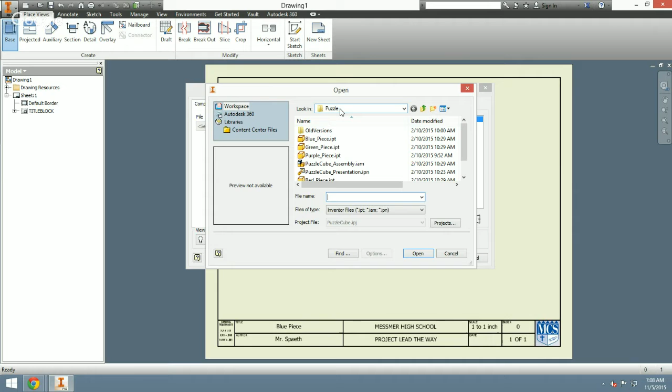So we're going to click this base button, and then we are going to hit this 'open an existing file,' and it should take you right to your Puzzle Cube folder because you set your project path. So we are going to grab our blue piece—I just double click it, and now I don't want to click anything else yet.

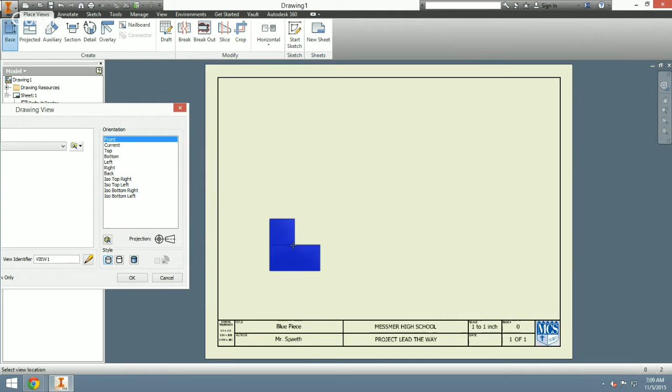What I actually want to do is drag this box out of the way because look what my mouse is doing. Okay, so it has my puzzle piece on there, a 2D version of it. The first view that I'm going to place is my front view, so I'm going to put it on the bottom left-hand corner of my page, leaving some room for dimensions—so right about here, right above where it says blue piece and Mr. Spaeth, maybe a third of the way up your page.

We can always move these around later, but we want to drop 4 views. Notice I can drop my right side view by clicking over here. I can drop my top view by clicking above my front side view, and I can drop an isometric view just by clicking at an angle away from my front view. Once we've dropped those, all I'm doing is just left clicking. I'm going to right click now and go Create, and there we have it.

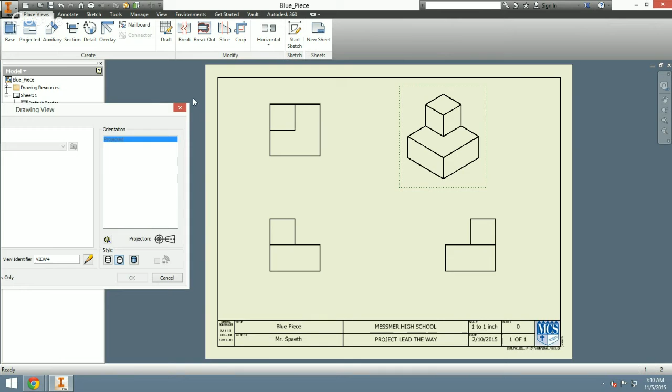Now I can add some color here, and it's very, very simple. Notice when I hover over a view, little red lines show up around them. I'm going to hover over my isometric view—again it brings up this box—and I'll drag it over to myself. I'm just going to put Shaded on, and look, it actually colors it for us, which is really nice. You can move these around as you see fit.

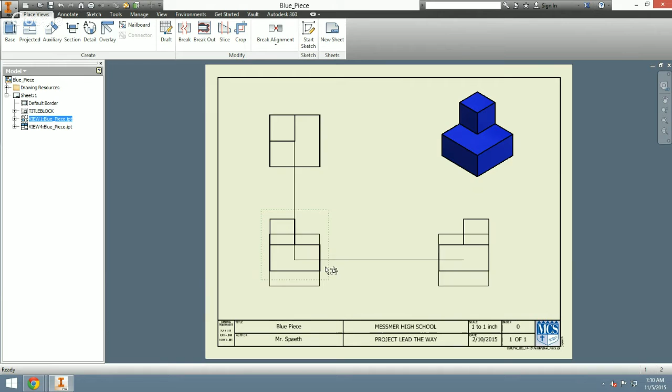Just make sure you don't click on one of these lines and move it, because that does some weird stuff. So whenever you see those little red lines and the little move symbol by your mouse, then you can feel free to move it wherever you want. So we have our front view, our top view, and our right side view. Again, you can move those however you want, but notice that by moving your front view, you move the rest of the views too.

Let's go ahead and put some dimensions on these. When putting dimensions on, I rarely use above my top side view or to the left side of my top side view. And I rarely use the bottom of my piece and the right side of my right side view. I like to keep all my dimensions within this little square, just to make sure everything looks really nice. Sometimes I can't do that, and there are dimensions I need to put out on the outsides, but for right now we should be able to do everything within that little box.

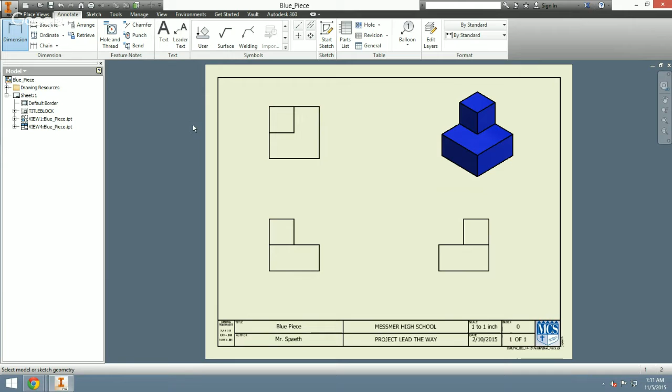So we're going to go to the Annotate tab, and we're going to use the Dimension command. There's a bunch of other commands over there that we'll learn later, but our Dimension command is really nice. Okay, so we want to dimension our features.

Notice with this little part sticking up right here, this is a great feature to dimension. All I do is click - let me grab dimension again. Notice you can click this green portion, meaning the middle of the part, and you can click the corners. There's a couple ways to dimension: you can click corners and then drag up, or you can not click a corner at all. Notice there's no green highlighted, and it just picks the corners right there for me.

Be careful, because sometimes what you really want to do is click none of those green dots, but what you end up doing is clicking a green dot and going up here, and I get a lot of questions like, Mr. Spaeth, this isn't working. So be careful with what you're clicking here. If ever you want to get out of dimension, I just push escape. Notice I'm in it right now, it's highlighted, I push escape, and I'm out of it.

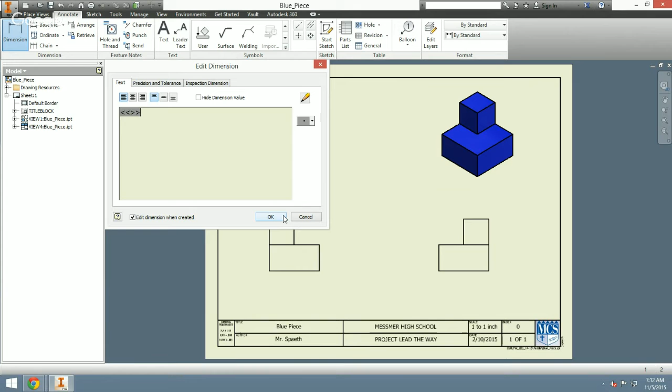So let's go ahead and dimension just the top of our top side view. Now, every time you make a dimension, this window pops up. I find it extremely annoying, so I unclick this button, Edit Dimension When Created, and click OK. That way, the next time I make a dimension - this time I'm going to do from right here to right there - it doesn't do it. I find that really nice. Again, I find it annoying that it pops up, so feel free to turn it off if you want to.

You'll notice that when I placed a dimension, and let me place another one here, I placed it on the marks where I had - notice all the lines are solid right here, and then there's certain places it snaps to that makes it a dotted line. This just kind of helps you space out your dimensions, and I want you to be able to utilize that.

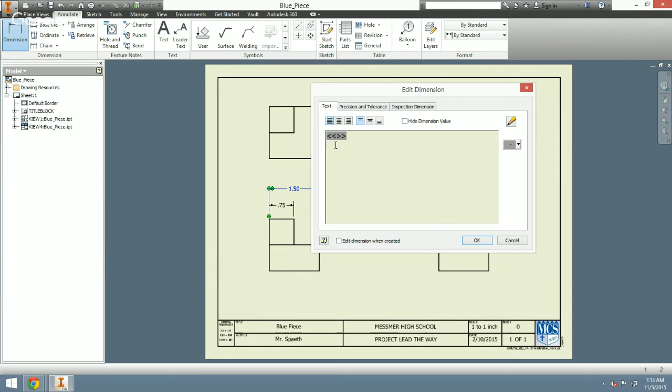So if you have two dimensions in a row, I'm just going to move these, and notice I'm not selected on dimension right now. If I was selected on dimension and tried to move these, it wouldn't work - it would highlight that, and I wouldn't be able to move it. So I need to escape and get off of where dimension is highlighted. Now I can move this just fine.

Notice that I can move these over to a point where they are now snapping to those places where they turned into dotted lines. Now I think these are too close. I'm actually going to move these out one more, and that looks about good right there.

So again, let's keep on dimensioning. I'm going to dimension this feature up here just to save some room. I could do the same thing I did on the top here over on the side, but I'm just going to use this one over here - 1.5, and then I can just make this dimension my 0.75.

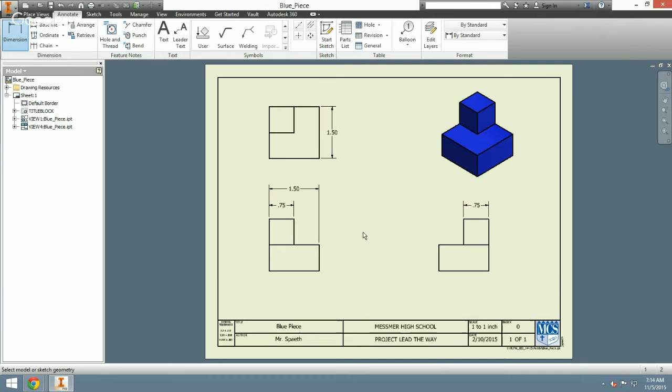Notice if I would put this dimension on here as well, these would be duplicate dimensions - that's the same thing. So this is the depth of our object. We measure depth from our right side view, going from left to right, and from our top view, from bottom to top. They both measure depth, so I don't need both. So I can just escape - if I don't have dimension highlighted, click on my dimension and press delete, and it's gone.

Okay, so again, I'm going to click on dimension. Now I could go right here and start dimensioning that, but notice what happens. I have two dimension lines that are crossing right over here, and I don't want that.

So I'm going to click escape, grab dimension again, and I'm just going to dimension them over here. Okay, so I have that one, and then from there to there, and then notice my overall dimension, meaning the one that's biggest, is on the outside, not on the inside. I do not want something like this. That would not be good dimensional technique.

Okay, so I have my width dimensioned, I have all of my height dimensioned, and I have my depth dimensioned right now. I would say that I'm done.

Okay, so I would just want to go to Save As, and we're just going to call this puzzle drawings. Notice I made it plural right there.

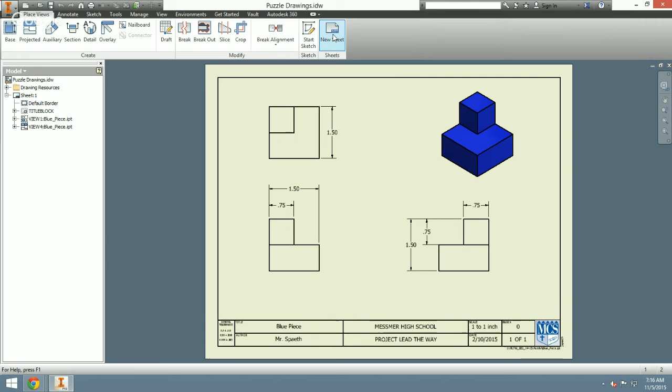One thing we can do is if we go to Place Views tab, I can now start a new sheet, and again, I'm going to go 1 to 1 inch. Title block, Mr. Spaeth, name of drawing. You know, I don't know if I have a green piece, but I'm just going to label it green piece. And here we are, I have now two sheets open.

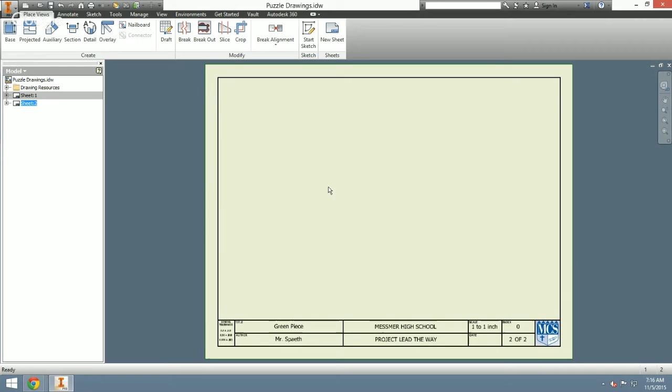And this basically means I can put all of my drawings in one file. I don't have to have individual files for each one, which I think is really, really nice, and I'd like you to do that. Okay, so again, I'd go to Base, and then open an existing file.

And, oh, I do have a green piece. Sweet. Okay, open, and then I'm going to move this out of the way. I'm going to click for my front, my right hand, and my top view, and then give myself an isometric as well.

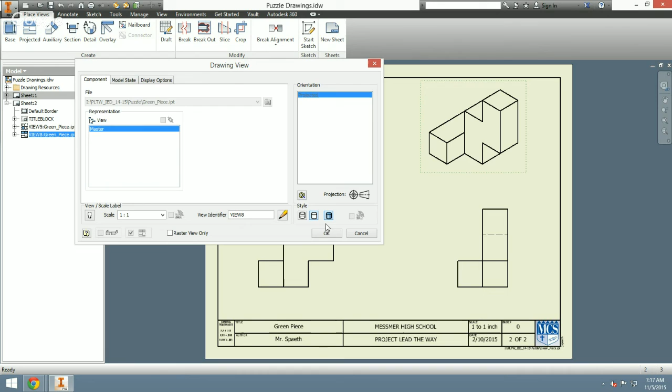I'm going to make this isometric shaded. Notice it says shaded right there. Okay, and then I'm going to go ahead and start dimensioning.

Now this piece is really funky. We're going to have some dimensions on a lot of different sides here. So some of these can get pretty detailed, but again, they're not too hard. We're just dimensioning straight lines, so let's not make it too difficult on ourselves.

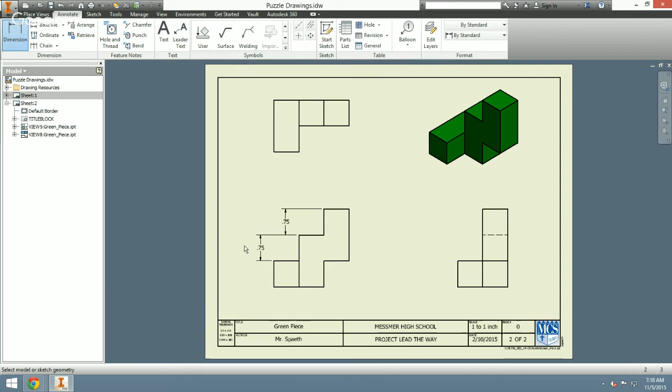So I guess one way that I would do this would be right here. I like to do those features on this side just because that's where the features are located. So dimensioning them to the left of my front view isn't something I would normally want to do, but it's something I'm going to do right now.

And now notice I do not need this dimension right here. I could use it, but I already know this one because I have 0.75 here, 0.75 there. These lines are obviously straight away from one another, and so I would want to delete this 1.5 as being a multiple dimension. And then if we go from right here to right there, we'd have 2.25.

Again, we would have a multiple dimension if we made this one of our dimensions, because I already know this. I can take 2.25 and subtract 0.75 and another 0.75 and get 0.75 there. So I would call that one a multiple dimension as well.

Okay, then just some other things. We would want to dimension this little part. And over here we would dimension the overall on the outside.

And then one more, we wouldn't normally like to do it like this, but there's no good way, because if we dimensioned this right here, we would have crossing lines. And so we don't want that.

I'm actually going to dimension it right here and just line it right up with my other one. And if I want to move them, again, I got to push escape and then push them in or out. So there it ties in, and there it ties in.

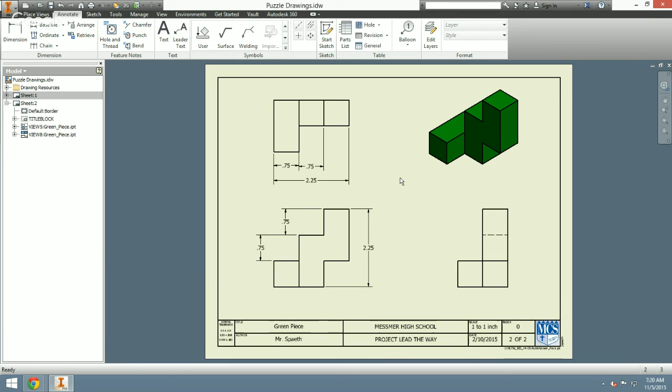So I hope you had a good time here. Hopefully you kind of understand how we do multi-views and dimensioning in Autodesk Inventor. Again, ask your teacher if you have any questions, and comment if you have any questions for me, and I can get back to you. Thanks.